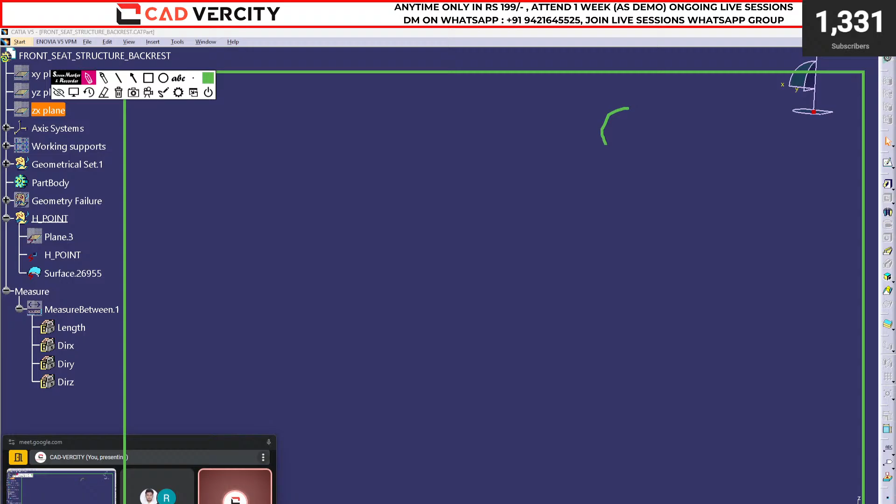Then you can take a top view, front view. Let's cancel this one. Undo. Here we will keep one assembly isometric view. Then here you can show the front view, top view. This is front view. This is top view. If you want, you can show the side view as well. Now you want to show the sections. On this, you can put some sections like this.

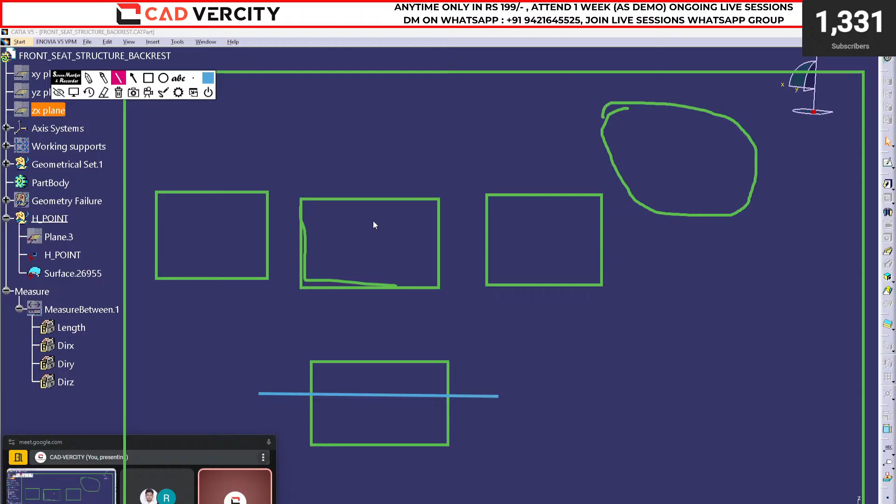So for this section, see, we have not completed this section. For this side section, the view will be on this side. Section cut like this. For this one, this view will be over here. You can put it over here, otherwise you can just move the view, no issue. It is not mandatory that your section cut should be in line with the views, okay? But your side view, top view, front view, try to keep them in one line.

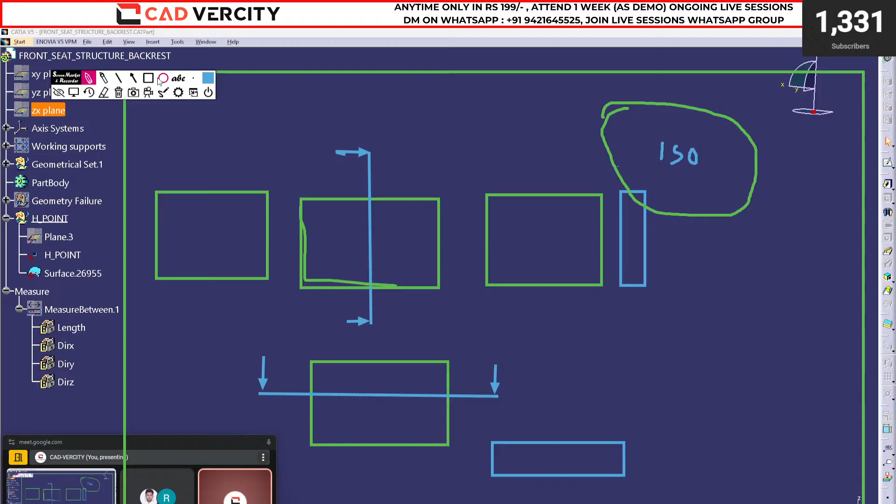So this will be your ISO view. ISO view means isometric view, okay? Now on the second sheet, you can add an exploded view. If you want to add it on the first sheet, no issue. Exploded view will be something like this. This will be your first part, second part, third part, fourth part, fifth part. You can show like this.

If you are assembling this part from the top side, you can move this upside. This is also going to assemble in this direction, no issue. You can just move the components which are going to assemble in y direction in the y direction. After this, you will have to create a BOM.

BOM means not exactly a BOM. You will have to add one table in which you will have a column for the serial number, and the second one for the name of the part. You will have to add balloons. 1, 2, 3, 4, 5, 6. There will be 6 balloons.

1, 2, 3, 4, 5, and 6. So what is the use of these balloons? This 6 number will be over here. 1, 2, 3, 4, 5, 6. And here will be the name of the parts. Got it? Yes or no? Sir, then what is the use of balloon? In balloon, you will mention only numbers 1, 2, 3, 4, 5, 6.

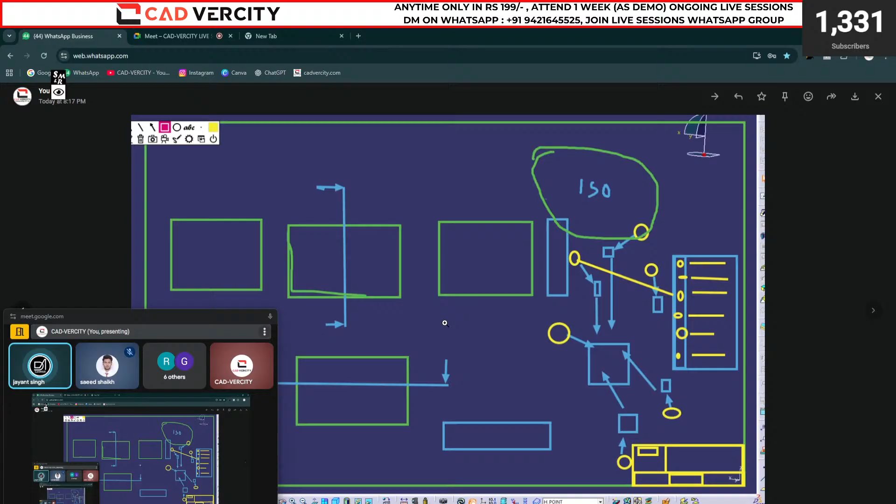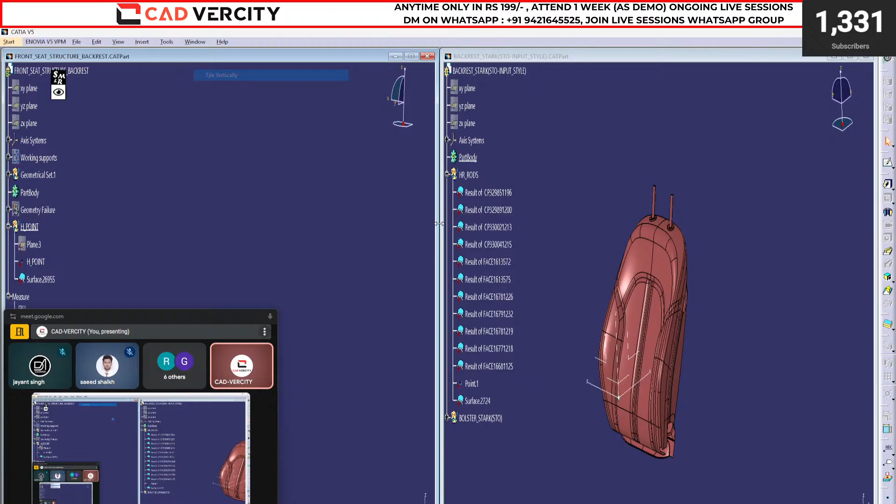Yes yes yes, no issue. Okay, so let's start. See, can you see my screen now? Yes, is it visible? Yes sir.

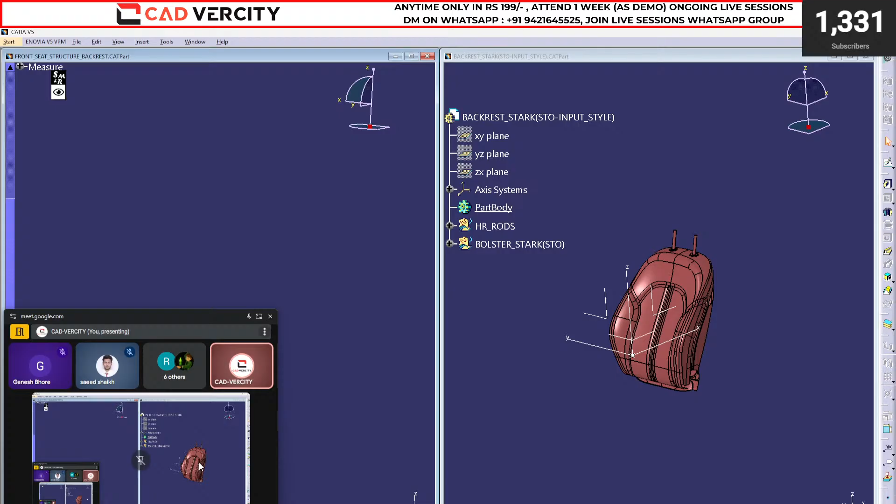Okay, now here you can see, Ganesh, as per your request, this is a backrest. Okay, so first requirement is here we have structure. On the left side window we have structure. Where is the fit all in? This one. Can you see the structure? Yes. Now what we will do, let's copy the structure and the style in one product. Windows vertical like this. File, new, take a product. Okay.

Again Windows vertical. Copy the structure. Right click copy. Right click paste. Right click copy the style. Right click paste the style. Okay, fit all in again. What is the issue? Why is it not working quickly? Fit all in is not working. No. We have taken the product. Sorry. Yes, fit all in. See, click on fit all in. It is not working. Why?

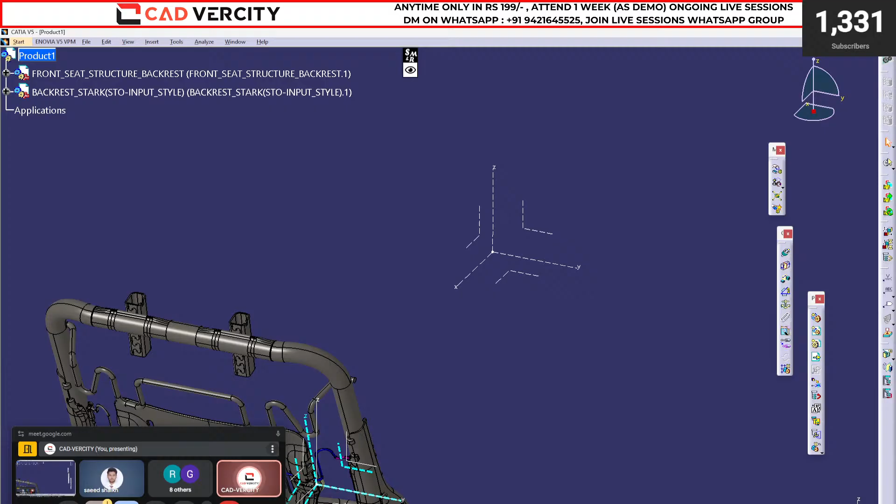It is a product. Inside that product we have two parts. No, fit all in means all 3D will be in, complete 3D will be fit in my screen. So why is it not visible? Because we will have to right click on the product, go to representation and say activate terminal node. Okay. See, now it will work. Fit all in. Okay. Again right click. If you want to put both parts in design mode, you can just right click component, representation, say design mode.

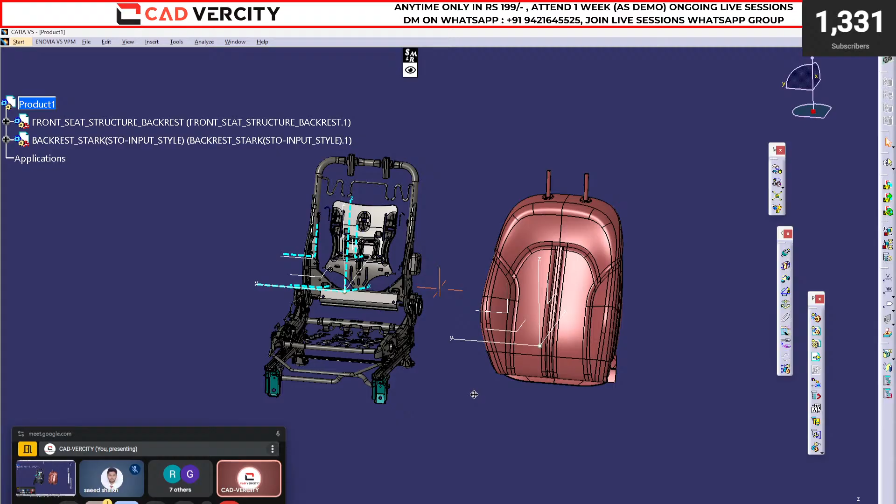Okay, now here you can see design mode. See, if you put your part in design mode, you can edit the sketch, you can edit any commands. If it is not in design mode, you can't edit it. Okay, you can't work on it. Okay, now tell me the structure and the style, the position is okay or not okay? Quickly. Not okay. So what we will have to do?

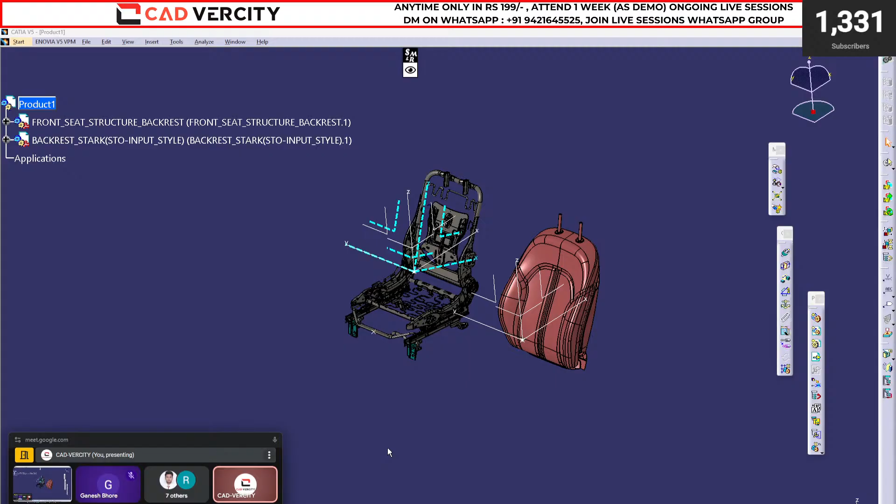Yes, Ganesh, others, how can we align? No manipulation. Quickly. Rajat, see, first of all, do you know what? Yes, Raja.

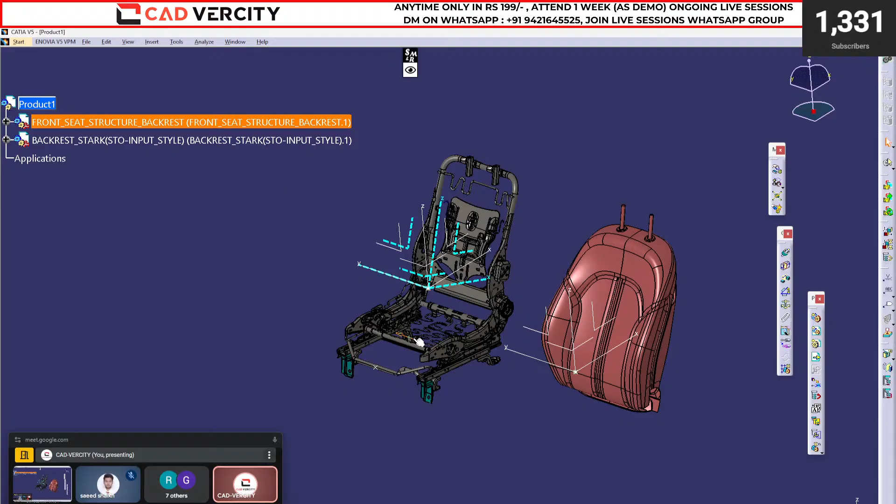Required? No. Otherwise, cost will increase. Height adjuster is mostly useful for the driver. Okay, so the basic structure will be the same for both passenger and driver, but some elements like the height adjuster and other lever mechanisms will be available only in the driver seat. Okay. So let me explain.

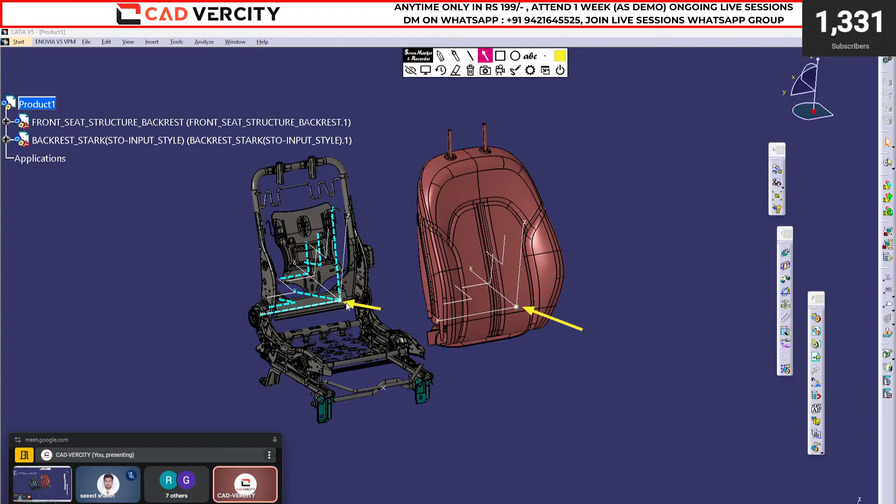So what is this? Let me explain to beginners. So what is this point and this axis system? Rajat, Said, please focus. Okay, top view. This is top view. And now where is the absolute axis system? Let's check where is the absolute axis system.

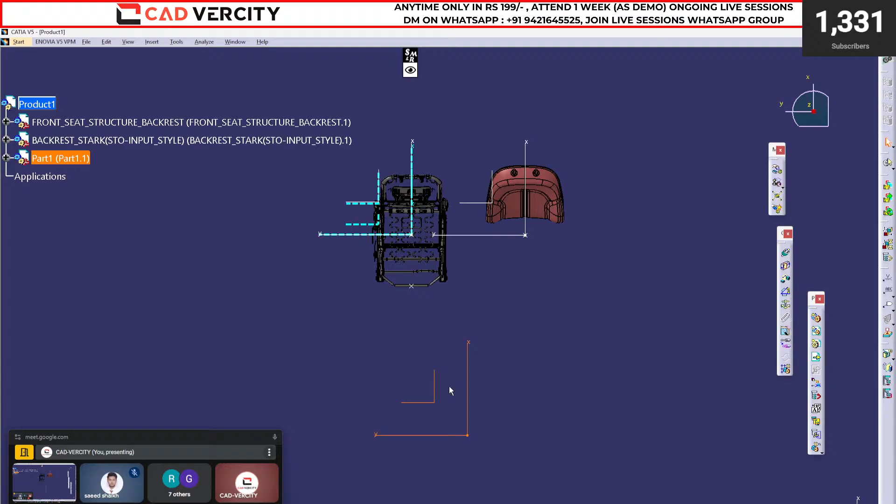Right click, component, add a new part. Click on yes. Can you see? Inside the new part we have the axis system, yes or no? This is our new part. Okay. So this is our absolute axis system. So suppose we are working in any file and in that file we don't have the absolute axis system, what will you do?

Ganesh, if you don't, yeah, see, delete. See, we don't have any axis system in this part. Okay, right click, open in new window. In hide and show, can you see? Do you have any axis system? Absolute axis system?

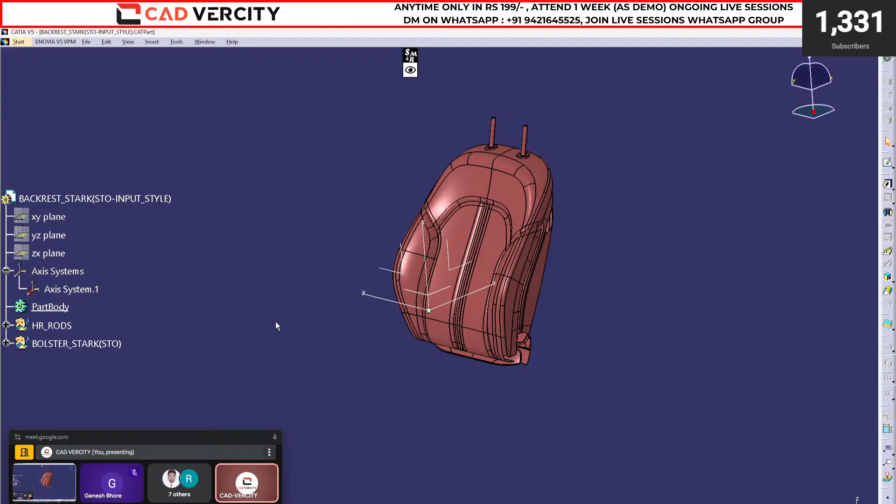Said, Rajat. Okay, sorry. Subhajit, this is here. Chinmay, Jain, Ganesh, Raja, Rajat, Said, Suyog. Okay.

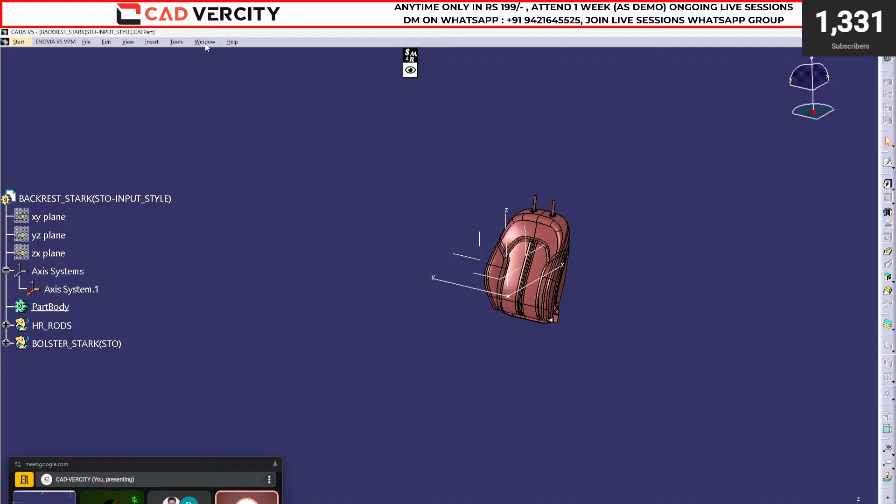Yes. Now tell me, is the absolute axis system available in this file or not? No. Okay. So how to create one absolute axis system? And what is the purpose of the absolute axis system? Let me explain. First, go to our product window. Double click, maximize the window. Click on Z. Here you can see, we have 2 points.

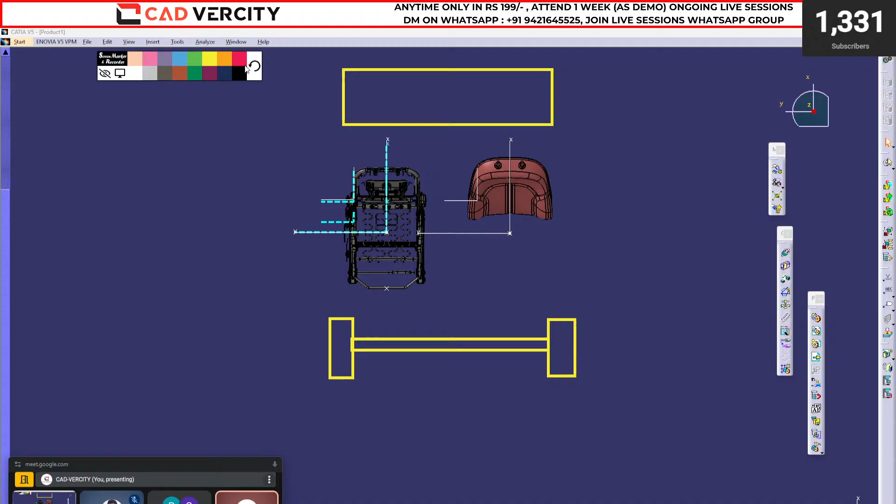Let's draw a rough sketch. See, this is the front axle of the car. This is your front wheel. Here will be the second row, and here will be the doors. Yes or no? Door will be here. Agree? Any doubt?

This is the front. The car view is on this side, and let's say here we have the steering. Now, what is the absolute axis system? The center of the front axle will be the absolute axis system, which is 0, 0, 0. Now, what are these 2 points? These 2 points are the H point. What is the H point? Quickly.

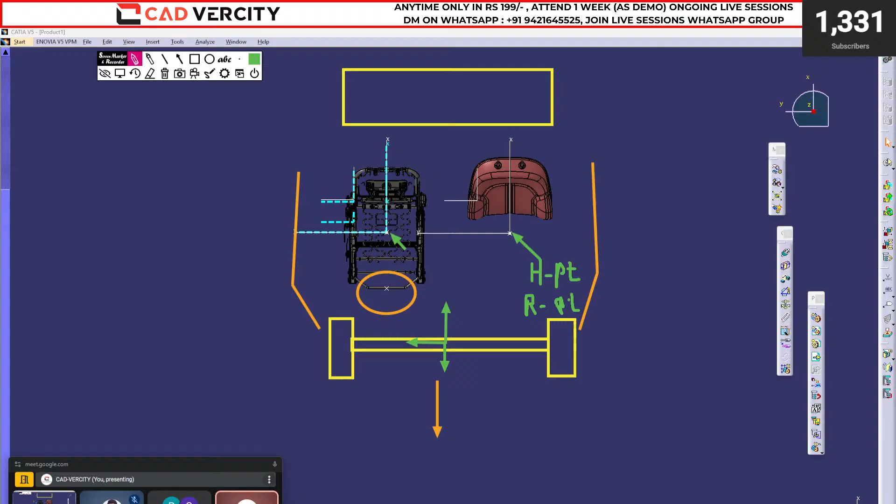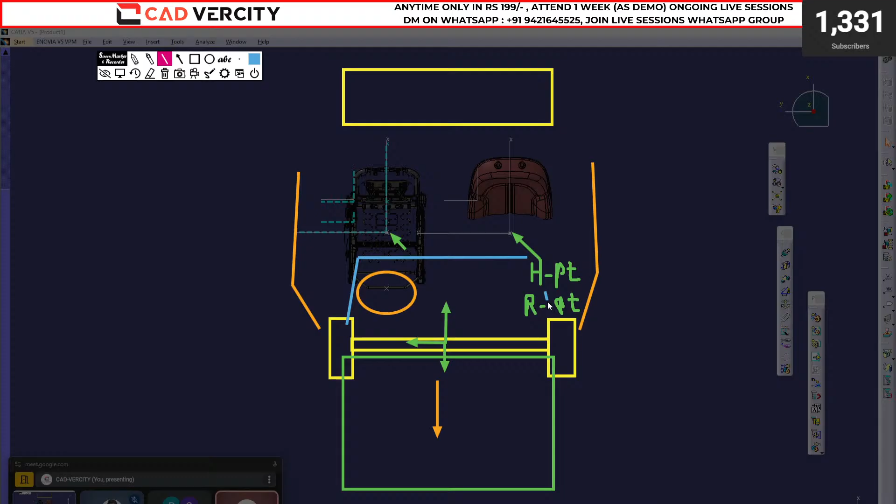What is the full form of H point? H point. R point. Quickly. Any doubt? Others? Here will be the front portion of the car. The front shield will be something like this. Yes or no? Here will be the headlamps, if we check from the top view.

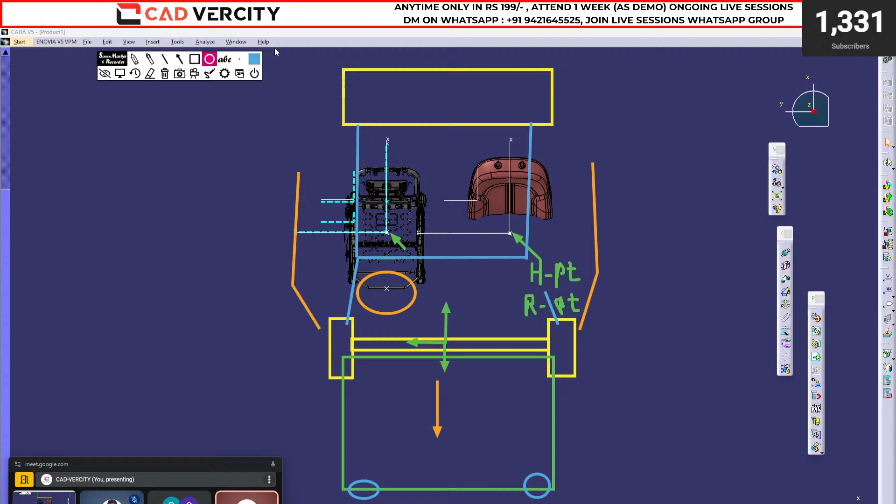What happened? Just a minute. So here, what is this H point and R point? Quickly. The H point is the hip point. Said, Rajat, what is the H point? Hip point. And the R point is the reference point. So are the H point and R point common? No. Both are not common. So what is the R point?

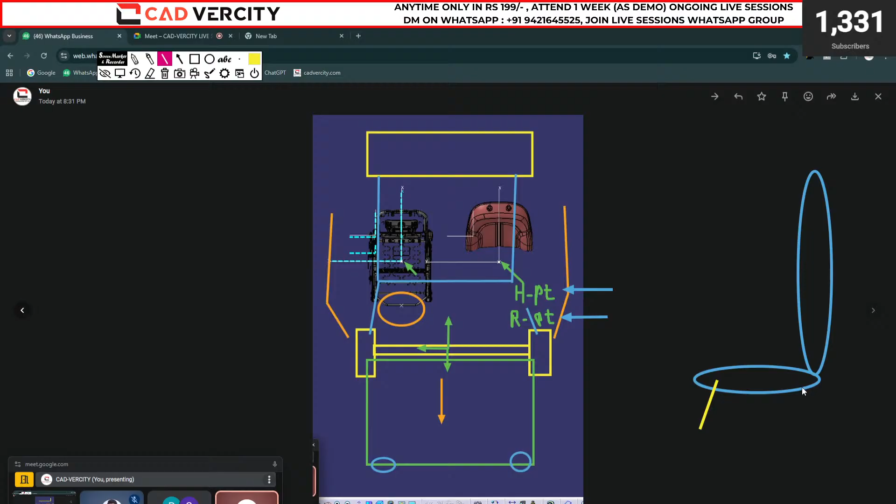R point, please focus. See, this is your backrest. This is your cushion. And we have some motions in our seat. Tell me, what is this point? Red point. The red point is your R point and H point.

Now tell me the direction. This will be which axis? Quickly. No, Z. This will be which axis? If we check from the top side, the first one is perfect. Second is perfect. And where will the Z axis be? Normal to my screen. Yes or no? Normal to my screen means this upside is our Z. Agree?

This will be Z. And this direction will be, quickly? You just told me, perhaps. Perfect. Which one? What do you think?

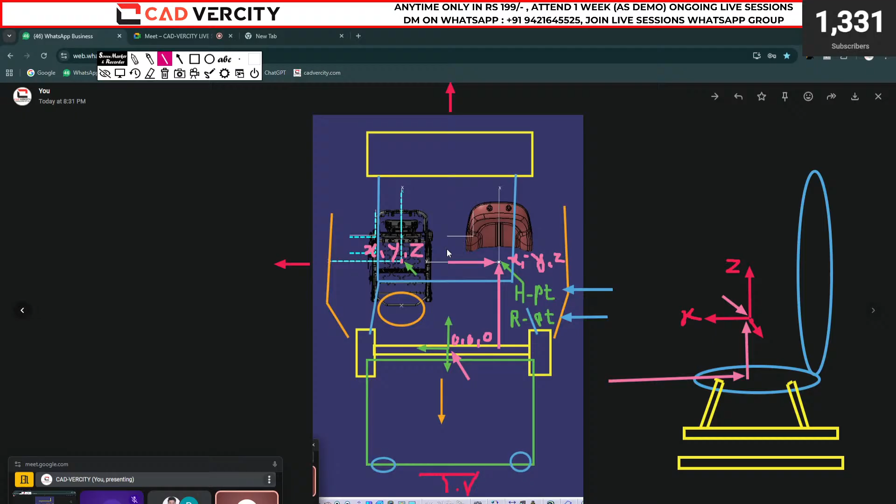Okay. What is outboard and inboard? Quickly. Rajat, Ganesh. Inboard means towards the center line, perfect, and outboard means away from the center line. Simple. Yes. Inboard means toward the center plane of the absolute axis system. Okay. Ganesh.

Yes, sir. See. Everyone, please focus. This is the center plane of your absolute axis system. Agree? Yes or no? Quickly. Okay. See, this is a plane passing through the absolute axis system. Now, tell me, is this the driver or passenger side? Driver side. So, tell me, will this side be inboard or outboard?

The first one will be inboard. Quickly, please focus, everyone. The first one will be the inboard. The second one will be the outboard. Any doubt? This is your absolute axis system. Its center plane will be the center line of your car.

Okay, center plane. So let's say Said, you are the driver. You're seated on this seat. So the center plane means the xz plane of the absolute axis system. Yes, because this is your y. Can you imagine?

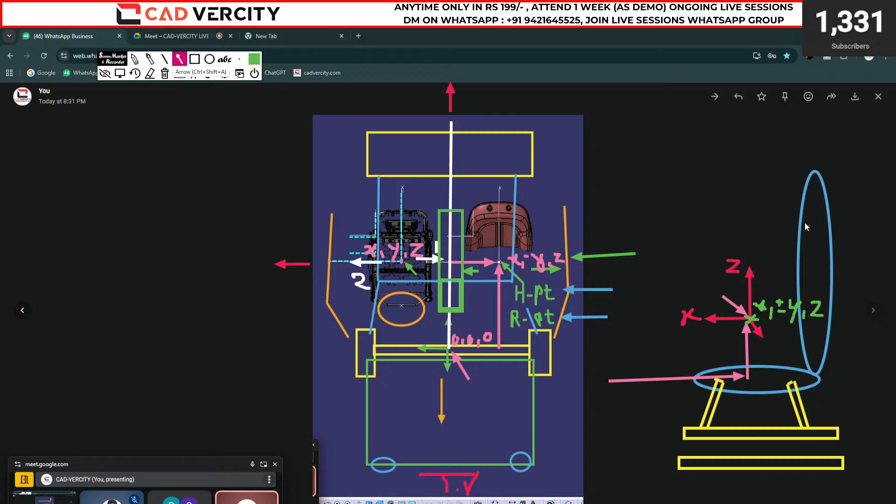Ganesh? What, when will you use the R point? What is the purpose of R point? Perfect. Good. It defines the position of seat with respect to BIW. Okay. It is, what is R point? It is a point which will define the position of seat inside the car. Okay, Said, Rajat, Ganesh, others, clear?

Okay. And what is the H point? Let's discuss first R point. See, let me take this screenshot first. Let me show you one video.

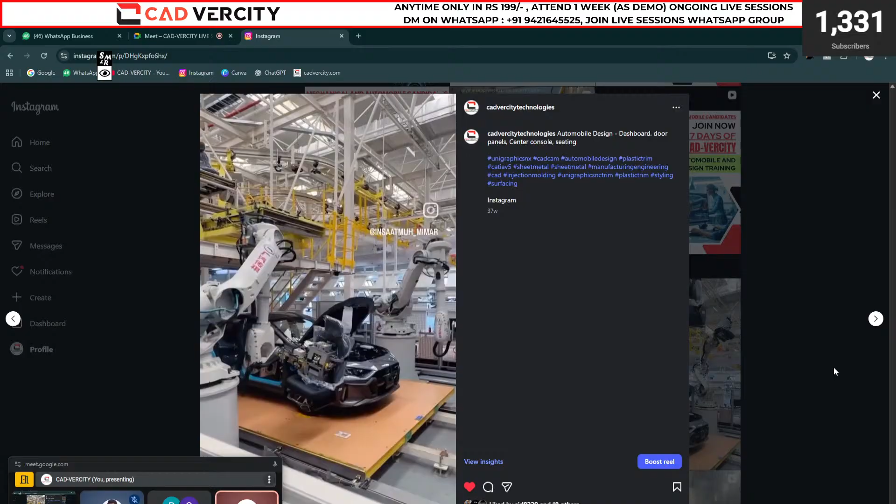Okay, let me show you one video. Is it visible? Can you see? Inside car, the robot is assembling the complete seat on BIW. See? Can you see this towel bar?

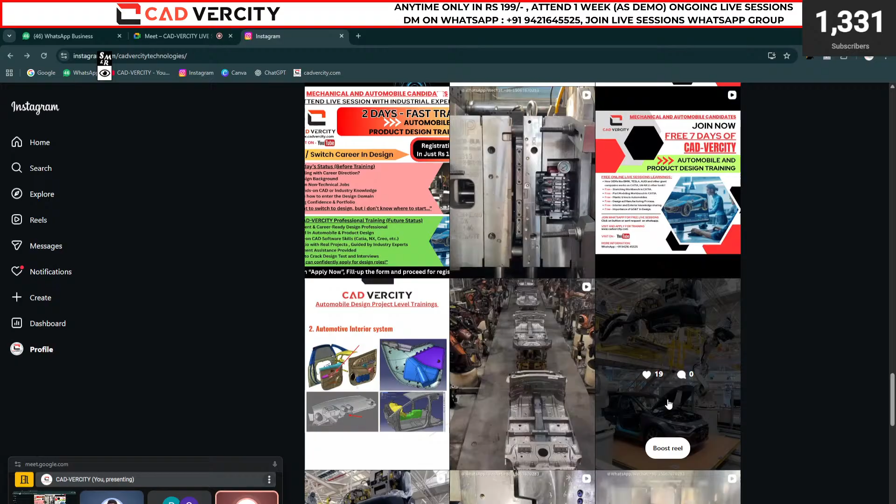Okay. So how? So what is the reference position? How is this robot assembling the complete seat inside a car? What is the position? The position of seat inside the car means R point. Got it? The position of seat inside a car is R point, means reference point. Then, sir, what is H point?

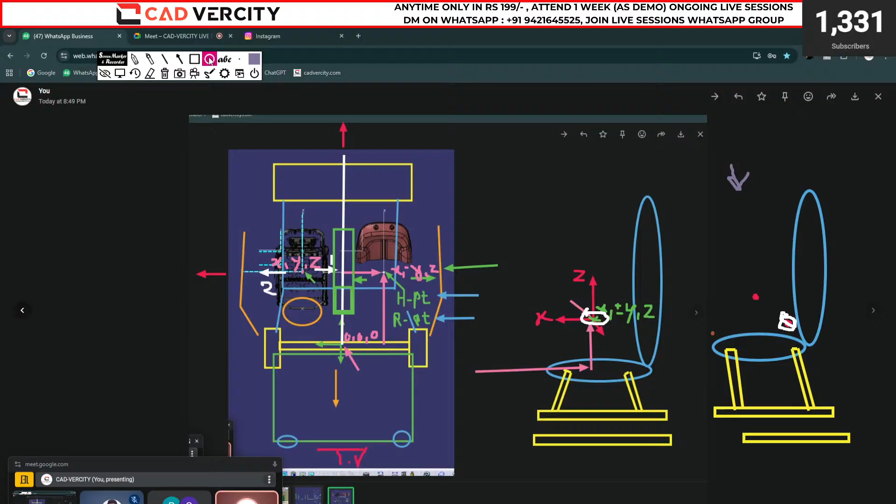So sir, what is, so that person we will call it as mannequin. What is this?

What is this? This is a mannequin. Okay, and this point will be the H point. Got it?

Rajat, others, tell me, did you move the seat? Did you move the seat? Seat is fixed. Seat is fixed on BIW, on the structure. What you have done? You have operated the mechanism. You have applied some motion of seat. That's why your position is changed now.

Okay, this is for a 4.5 height person. Now tell me, if the height is, let's say, 6.5, what will you do? This is 4.5. If height is 6.5, what will you do?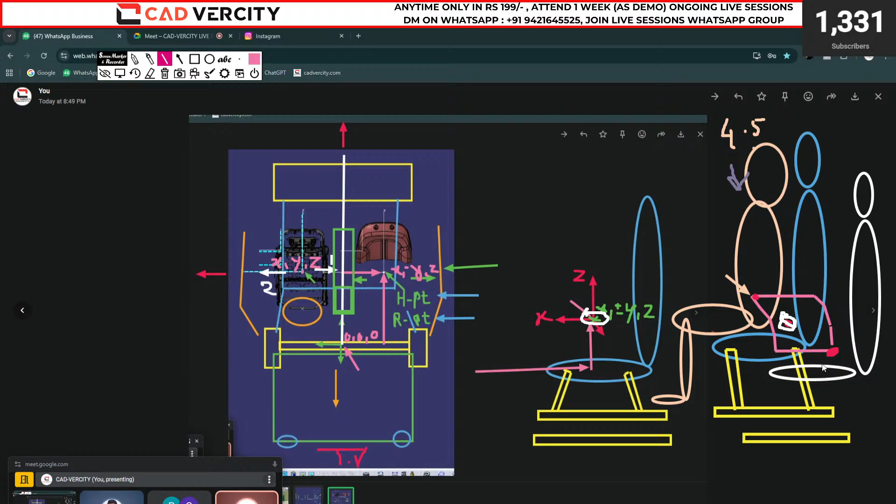See, it is not the highest and the lowest point, okay? The person, the driver, comfortable, yes, according to the occupant - not according to occupant. According to the kinematics of seat, the mechanism of seat, the possibilities of the H point in which it can move - that box, that zone, we will call it as travel box.

No, it is not fixed size. It depends, no, it depends on the mechanism. Depending on the mechanism of the seat. Every seat will have something different. Sorry, no no no, it depends on the mechanism. Clear everyone? Any doubt? Quickly.

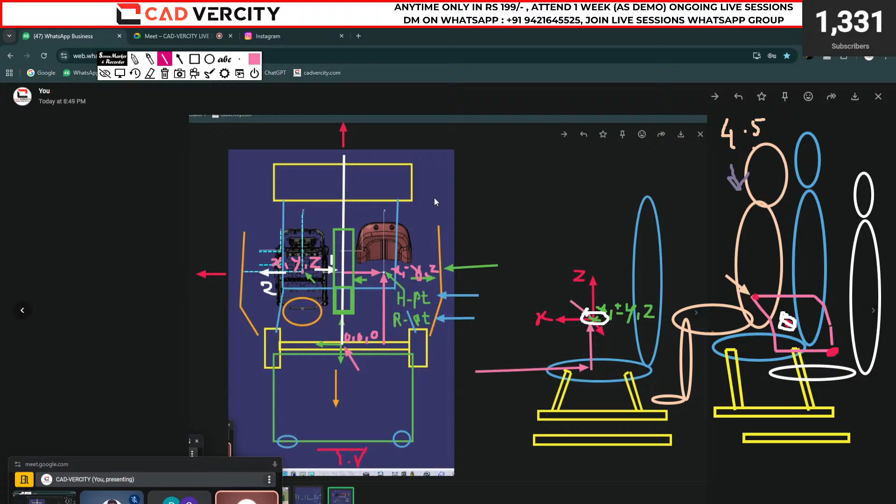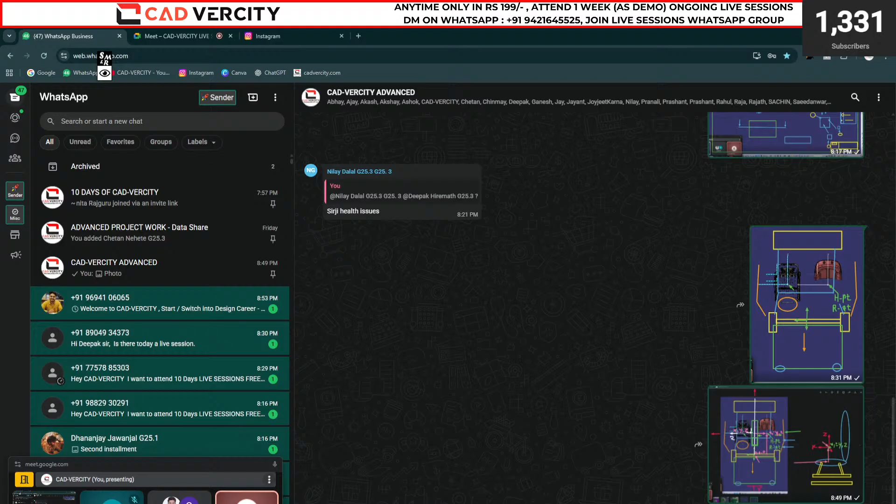Perfect. Okay, we have one request on YouTube chat.

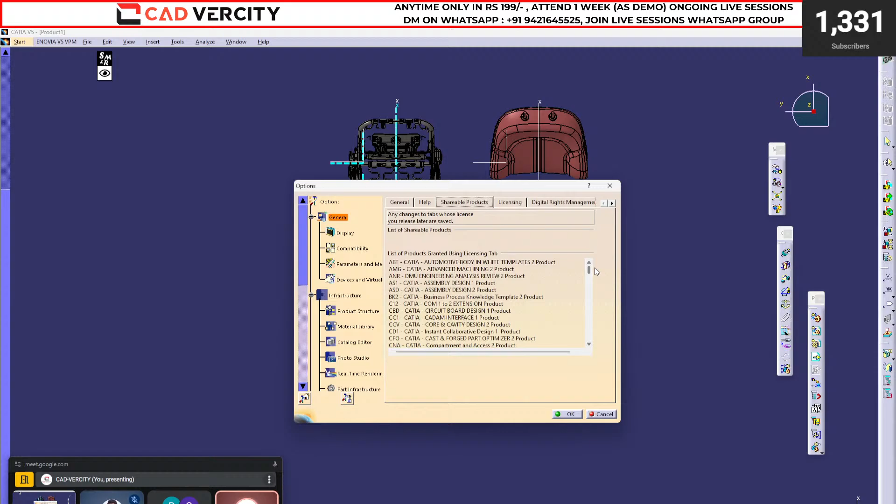So sir, do we have to learn all these licenses? No, only for now we will use GSD and we will use kin. Okay, for kinematics, if you want to build some kinematics, we will use kin. If you want to work on GSD, meaning generative shape design surfacing, you will use GSD.

Okay, coming back to our discussion, this one. Okay, so what is this box? Quickly, what is this box? Let's revise, quickly - travel box. What is the purpose of travel box? How will you define the travel box? What is the definition of travel box? Quickly, the reply should come in one second.

Sorry, please repeat, Ganesh. At what extent? Okay, so on which it will depend? Perfect. And which point will be fixed? What is the purpose of R point? To locate the seat inside BIW, okay, inside a car. And what is the purpose of H point? Tell me, between which components R point will show the relation?

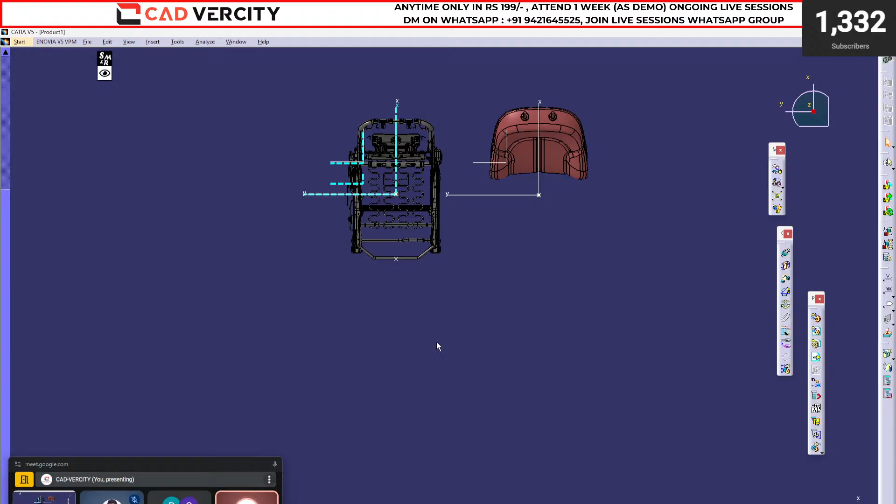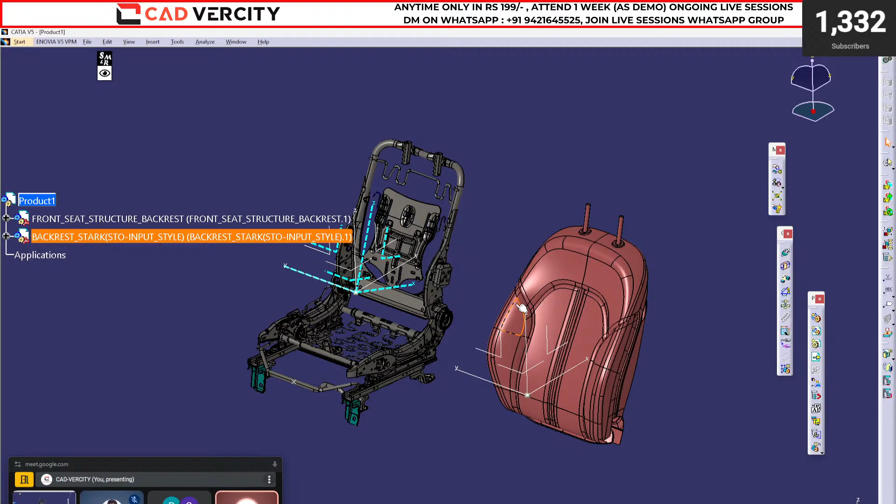Now here you can see this is style and this is structure. And what is our task? Now the task is you have to consider this style and create a form with respect to this structure. Now the blocking point, first is that the position of style and the position of structure are not matching. Both are not okay. So what is our first task?

You will have to locate this style on the structure, or you will have to locate the structure on the style. So logically which will be the good one? Logically, what makes sense? Will you take the style there to the structure, or bring the structure to the style's location?

Logically, when the style is created, the styling team, whenever they create this style, they will create it on the H point. They will consider the H point and generate this surface. So whatever style you have, you will not move the style. So while working on a project, if you have the structure, you should have two different structures for the passenger as well as the driver. Clear, yes or no?

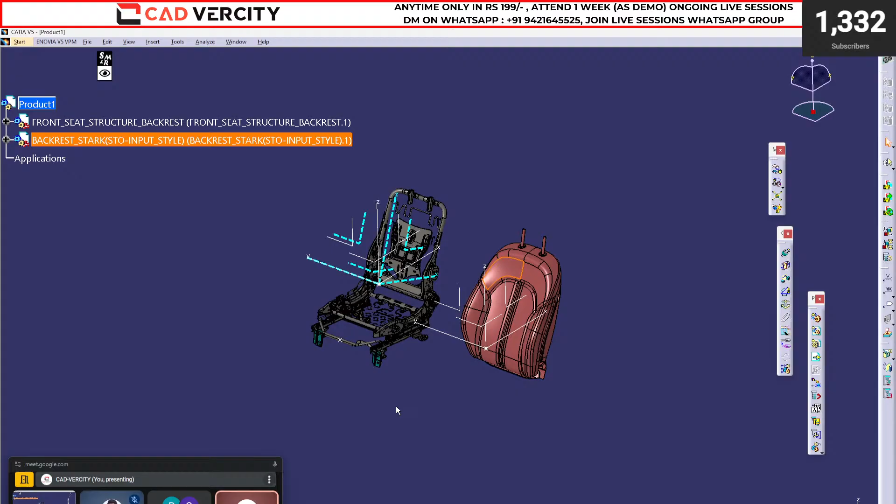Now let's say the style is same. As per input, if I have received that I have to use the same style for driver as well as passenger, then you can just move this style over there. Otherwise, if in the input they have not mentioned that you have to use a common style for both driver and passenger seat, you will have to ask for a new style for the driver, and this will be for passenger, and again you will require the passenger side seat structure. Clear?

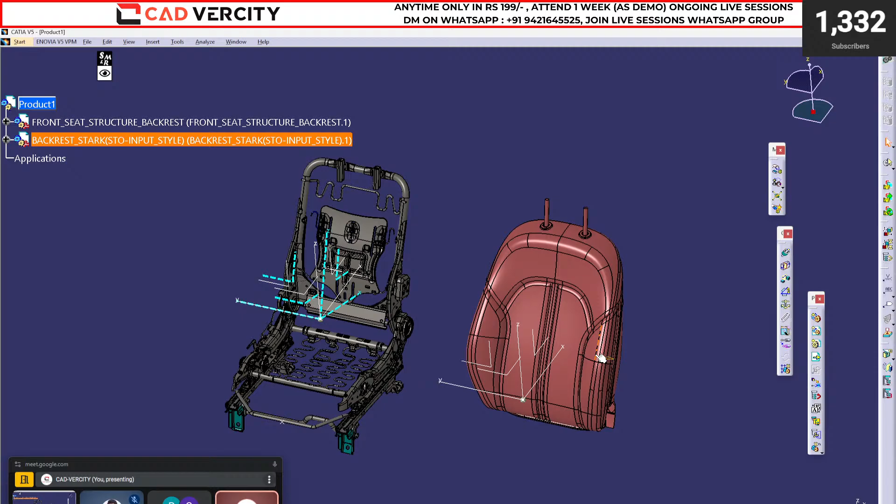Yes, because in driver seat we have so many comfort and other things, the kinematics, massager and all, heating mat and all. Yes, even though on the backrest mostly here an airbag is also present.

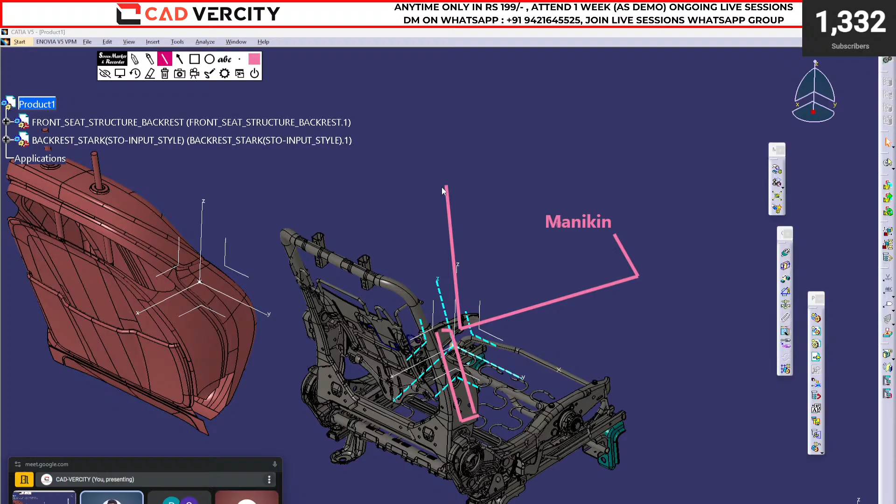This is, sorry, there's a lot of tool issue. On this side mostly we have the airbag model, on the outboard side. Why? Because here the mirror window is present. Yes or no? This is door. Okay, so on this side we will have one airbag.

Okay, now tell me, airbag will be deployed like this, yes or no? So let's assume that we have one manikin over here. Here there's a style. We have style over here. So airbag is deploying, and the airbag's model is on the structure.

So tell me, we will need one cutout in our foam, backrest foam here, a cutout will be placed from where the bag, the airbag, will come out. Yes or no? So tell me, can you use the same foam on this side? Yes or no? Why not?

Airbag extra नहीं. We will need airbag from this side, yes or no? Outboard side for the passenger. This is driver, so this is outboard side. So we can't use same foam on both sides.

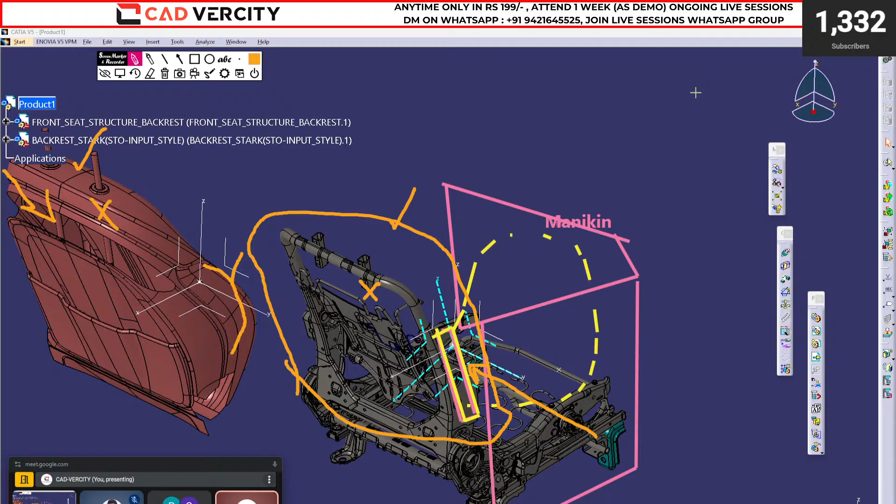Okay, but yes, see ये जो है कटआउट डालना वगैरह ये जो बैक साइड से जो कुछ रहेगा, this is our part, engineering part. But for style we can use it, yes or no? In style they will not add any cutout. Why? Because it is a technical portion, we will have to add cutout. The styling team will not add any cutout. Clear? It is a technical portion, so we will have to modify. डिस्कस करेंगे कि कैसे मॉडिफाई करते हो. ओके.

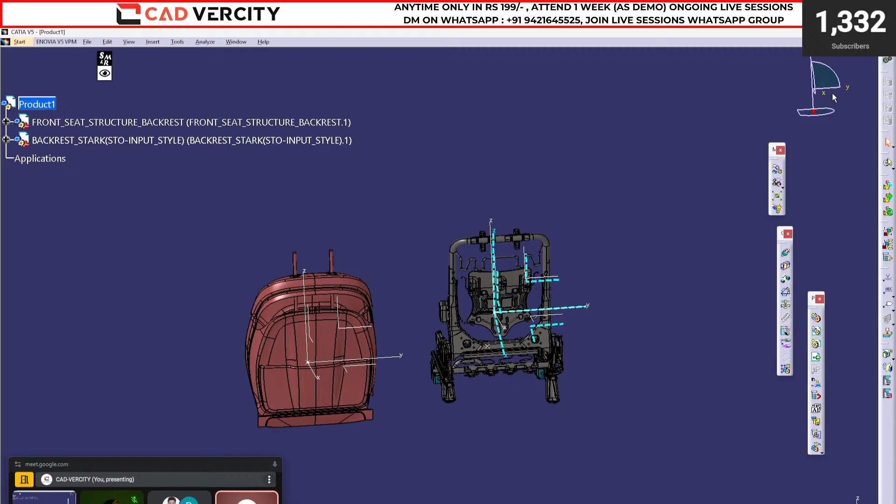See, we have the style. Let's say, click on Y, X. Let's say we have this style. What I will do, let's copy this style. Right click on the product, paste it. I have 2 copies now. What happened? Right click, copy. Right click, paste. Yeah, I have 2 styles. This is the first one, this is the second one. Let's hide the first one. Let's move this style over here. So how to move? Simple.

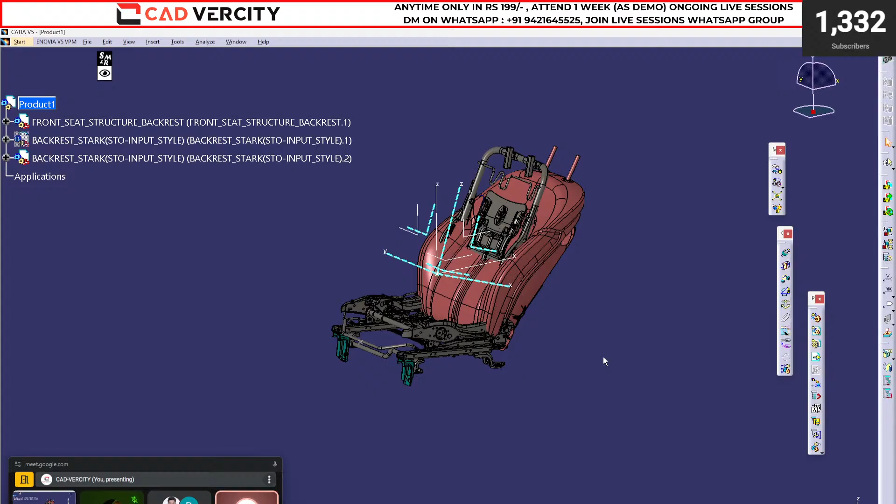Snap this axis system on. See, आपको axis system select करते वक्त same axis system select करना है. You can't select this axis system with this blue one. See, समझ में आ रहा है क्या हो गया? Yes or no? Depending on the orientation of your target axis system, the orientation will change. So undo. First you will have to check, यहाँ पे axis system ऐसा है.

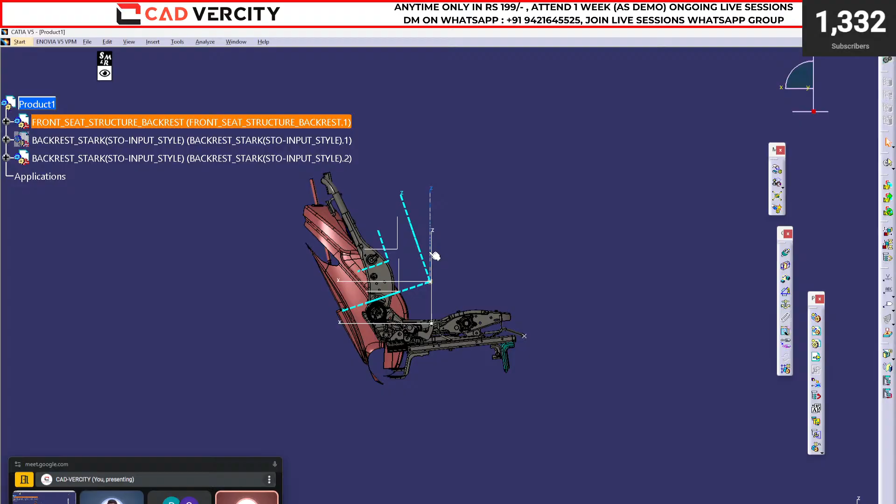If I click on Y, see, in this file I have axis system like this: Z, X and normal to screen Y. On this structure, if I click on the structure, I have 2 axis systems. One is this one and second one is this one. So कौन सी axis system use करना पड़ेगा? Which axis system will I have to use? This white and this white for the location. So while working on snap, click on the snap. पहले सोचना है, you will have to think what you have to do now.

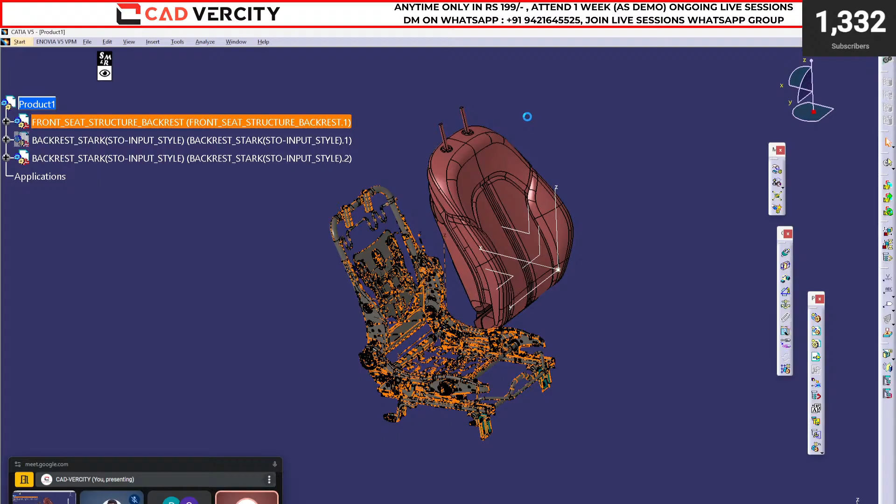Should I move this style on the structure or should I move structure on the style? For this project, let's consider we will use the same style for this side seat. So what we'll do? Yes, perfect, side. If we have different style, then we will use the different one, no issue. Okay, so this time let's fix the structure. Select the structure, click on fix. Done. See, in constraints you will find one fix. Can you see front seat structure backrest? Right click, hide it. Done. Any doubt? Yes, no?

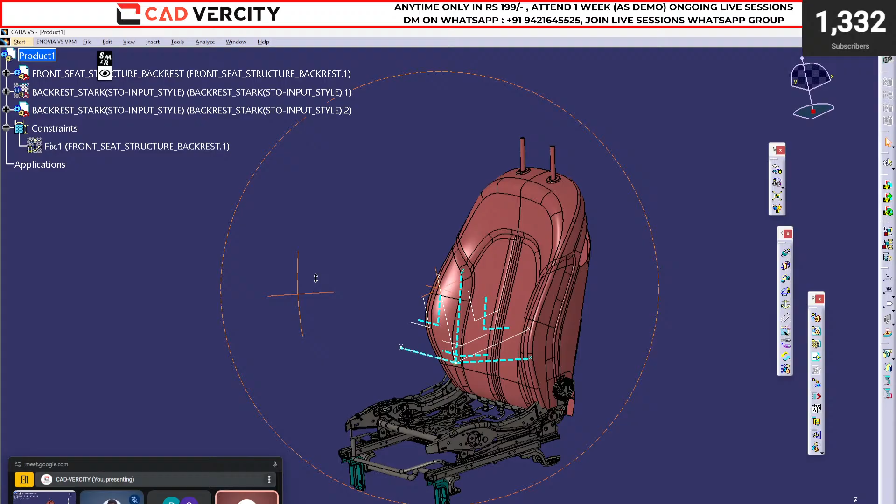No. Perfect. Now, what we discussed, seat को fix रहने देते. We will move the style on the structure. So, tell me, in snap command, selection कैसा रहेगा? What will be the sequence of selection? Rajat, Chinmay. Perfect. Activate the snap, select the axis of the style and कौन सा axis select करना पड़ेगा? Blue or white? White. Click on it. Now tell me, is it perfectly fixed? Yes or no? Any doubt, any issue? Done?

Now let's fix both. Select this style, make it fix. Hide this one.

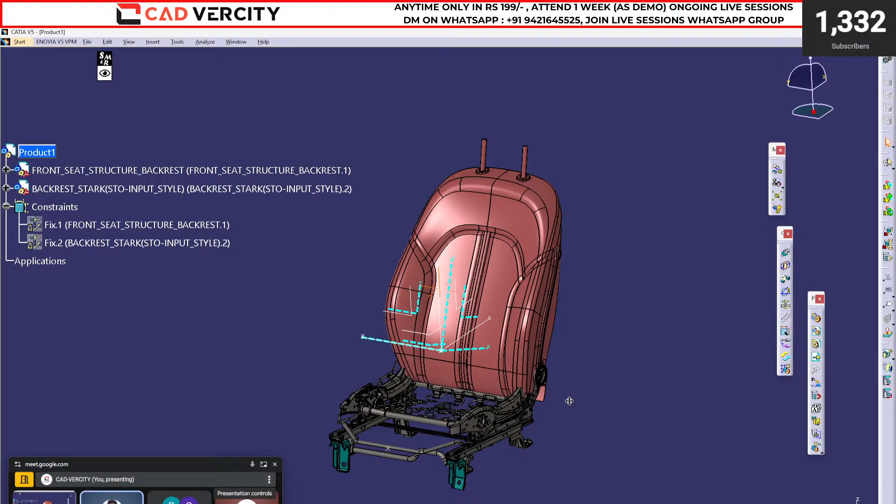Now sir, I want absolute axis system. I want to check what is the coordinate of my seat. Sir, how to check? बताइए. What is the process? Quickly. I want one absolute axis system. Quickly. Sorry?

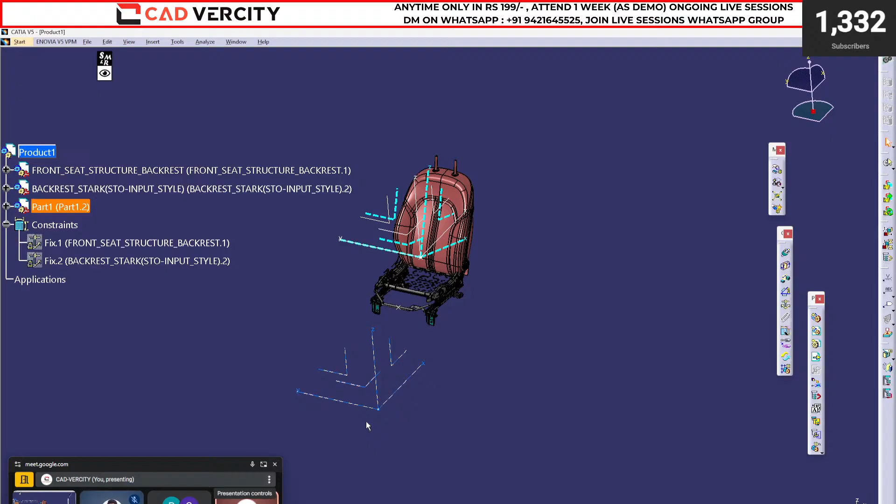Okay, it is an empty part, but we will have an absolute axis system. यहाँ पे दिख रहा है. Okay, now sir, I want this axis system inside my styling part. This is my styling part. Yes or no? STO style input. Okay, sir.

इसको क्या क्या कहते हैं? What is the naming convention for this one? Some companies, some OEM, some MNCs will call it as Stark, STARK. Someone will call it as style. Someone will call it as STO. Clear? Depending on country to country.

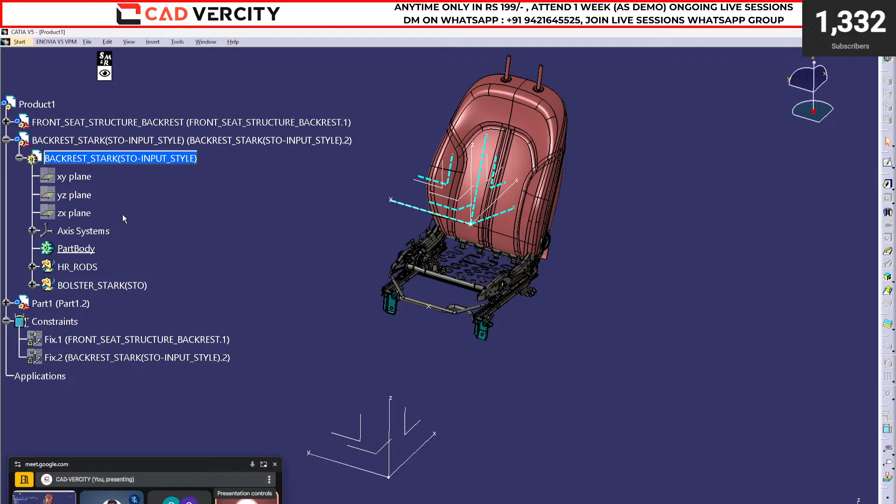Okay, style means STO. Now we have inserted a new part. We got one axis system. Now sir, I want this axis system inside my file, this file. So double click, activate your part, this one, double click on it. Where is this axis system? Right click, center graph. Here is my axis system. Can you see absolute axis system? Right click, copy.

Double click on this one. Where is the style? This one. Backrest style. Double click on it. So it is in blue color, means it is activated. You will have to double click. Right click, paste special. As a result, click OK. Any doubt? See, expand this one. We got a new axis system 2, which is our absolute axis system. Yes or no? Clear? Yes, sir.

Now let's hide this part 1. See, click on your Stark style.

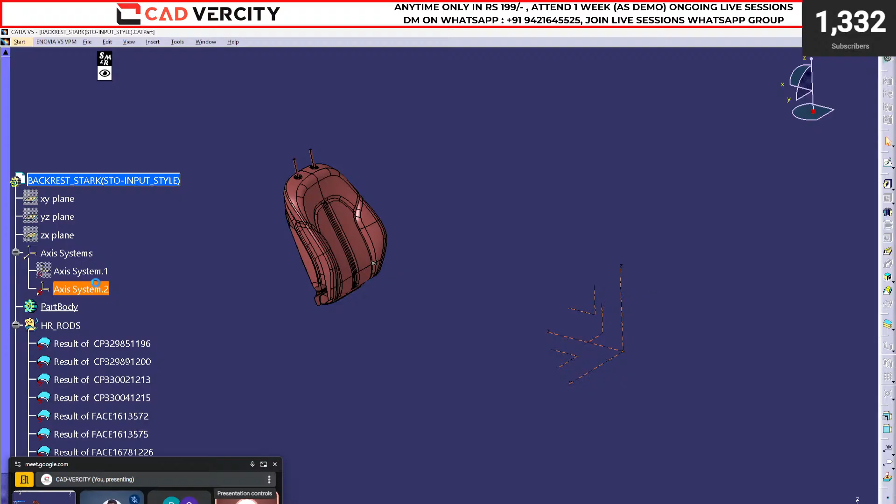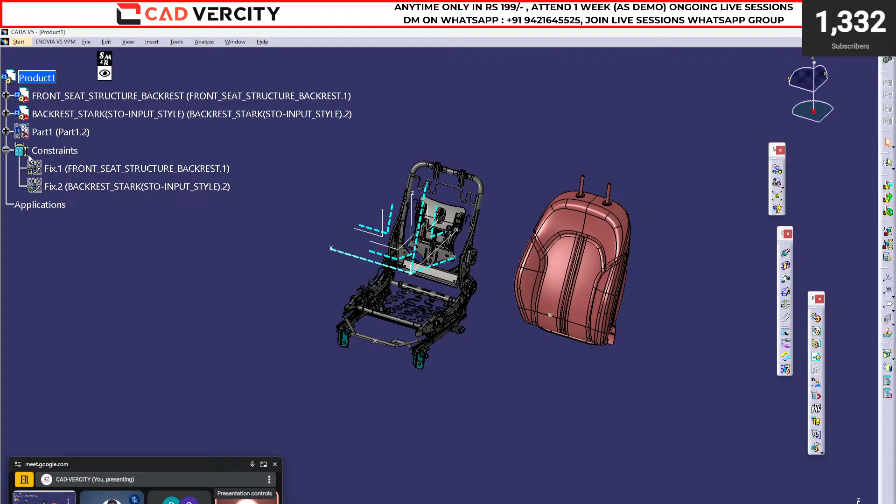Delete this fix. Now in this case, what you can do quickly, we don't have any axis system, but we have H point, we don't have absolute axis system. Any logic? I want to position this style on this structure. What you will do? Quickly. I will create one axis system. Where? Let's delete this one. Tell me from first step. Quickly. Last point, then we will close the session. We'll connect tomorrow. Tell me, how will you create the axis system?

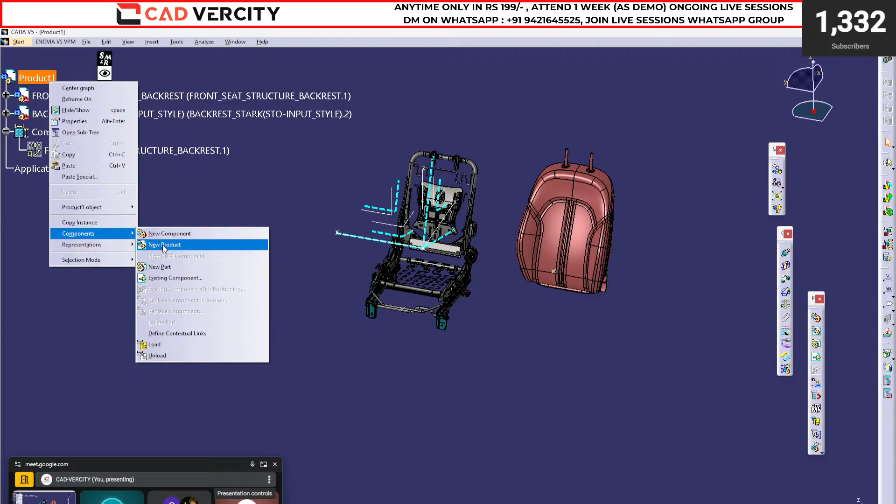अभी हमने किया, just now we did. Right click components. Perfect. Product or part? New part. Then go to part 2. Double click, right click, center graph, right click, copy. Then go to product. Paste special. Product, paste special what?

Where? In style. Okay, in BACKREST style. Double click on it, right click, paste special as a result. Okay, then we got one axis system, which is absolute axis system. Then

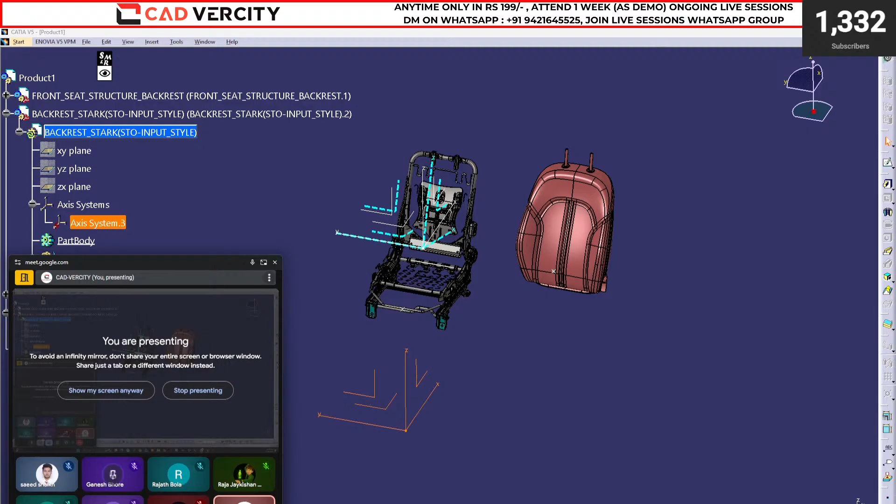No background noise. Then others, क्या कर रहे बाकी? सुभजीत, सचिन, चिन्मय, what are you doing? सचिन, चिन्मय, सुभजीत. I think Subhajit is in office. Chinmay, Sachin. Quickly, next step, quickly.

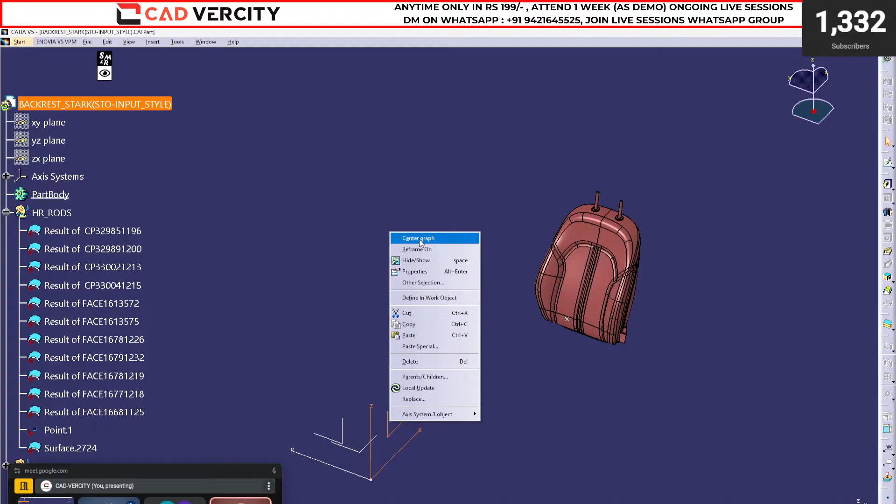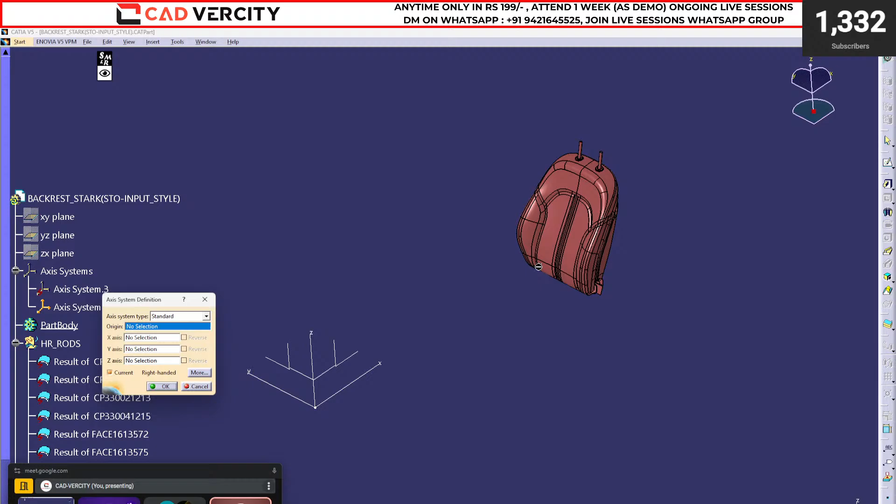See, open this style in new window. Okay. See, we have absolute axis system, yes or no? यही लाया था हमने axis system 3 जो copy paste special as result किया था. Yes, we have H point. Can we create one axis system? Before creating axis system, make this axis system as current, because this is our absolute axis system. Then insert one axis system on this point. Click OK. Any doubt?

Yes or no? No. Control S, save the file. Now Control Tab to switch the window from part to assembly. Control Tab. I'm in product now. Assembly. Okay. Double click on the product. Now, can I repeat the same command?

Snap this axis on this one. Tell me, can I hide this axis? Yes or no?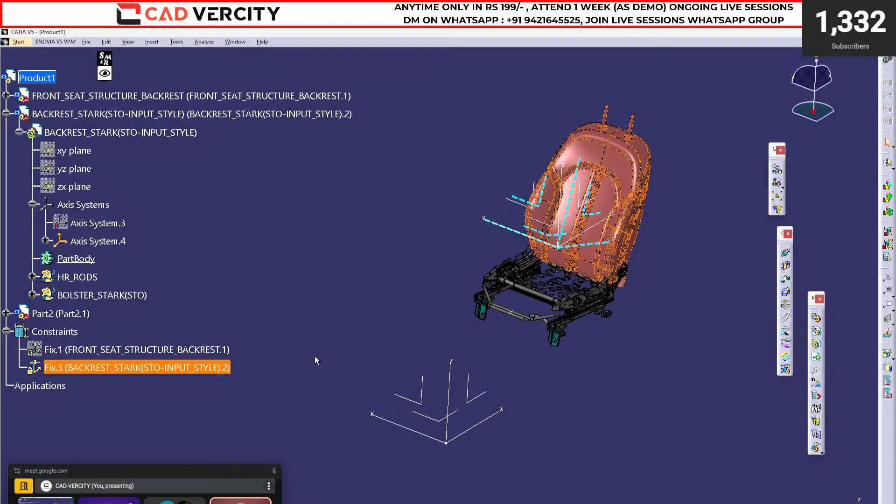Yes or no? Quickly. Select the style, activate the product, double click on it, select the style, fix it. Clear? If you don't have any axis system and only if you have the H point, can you create one axis system with respect to absolute axis system? Yes or no?

And what if you don't have the axis system in structure as well? Structure में भी axis system नहीं है. What you will do? You have the structure, you have the style, but you don't have the axis system. What you will do? Quickly. Okay then. कैसे create करोगे Ganesh? How will you create? With same process?

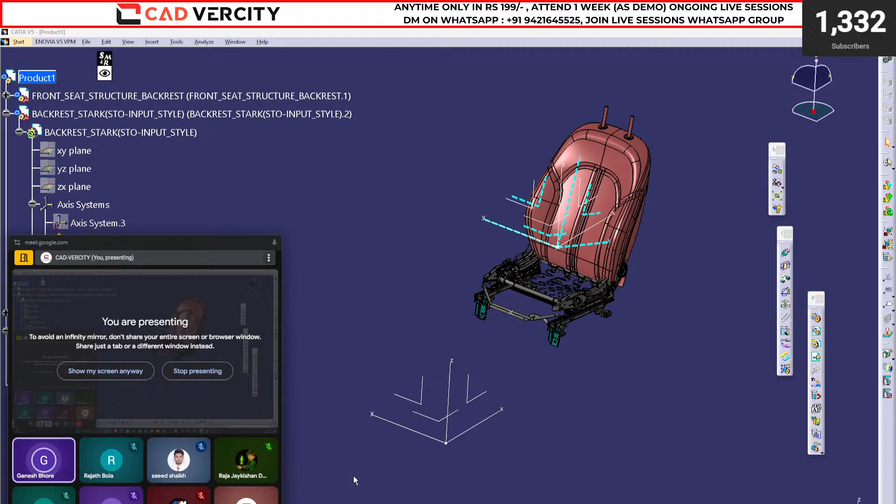हाँ, simple. Then you will repeat the process, same process for structure as well as the style. You will insert a new axis system on H point of both the structure as well as style. Then you will just snap from style to structure. Okay? Clear everyone? इतना दिमाग लगाना है. Clear, yes or no? Okay. Good question, Ganesh.

Sir, what if we don't have any H point? So in that case, your client will share the coordinate 300, minus 450, 268 like this. Clear? Now tell me, you have the H point? This will be in your presentation. Ganesh, clear? Everyone? Yes. Now, if you receive the coordinate, what you will do first? Simple, we will create the H point with respect to absolute axis system. मतलब 0 0 0 से you will create a point at 300, minus 450, 268.

On that point, what you will do? You will create the axis system. You will insert the axis system. Same you will do for the style. Because for the structure and for the style, the R point, H point will be same initially. Okay? Ganesh, clear? Yes, sir. Perfect. So for today, let's stop. Good.

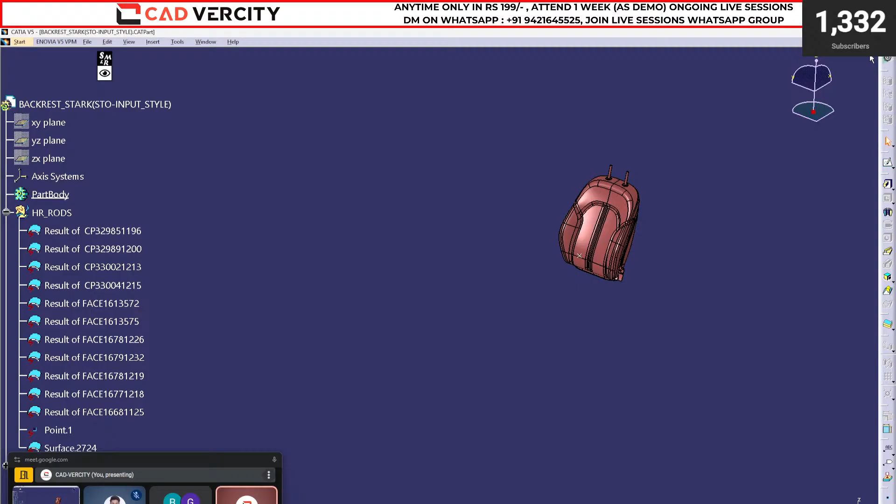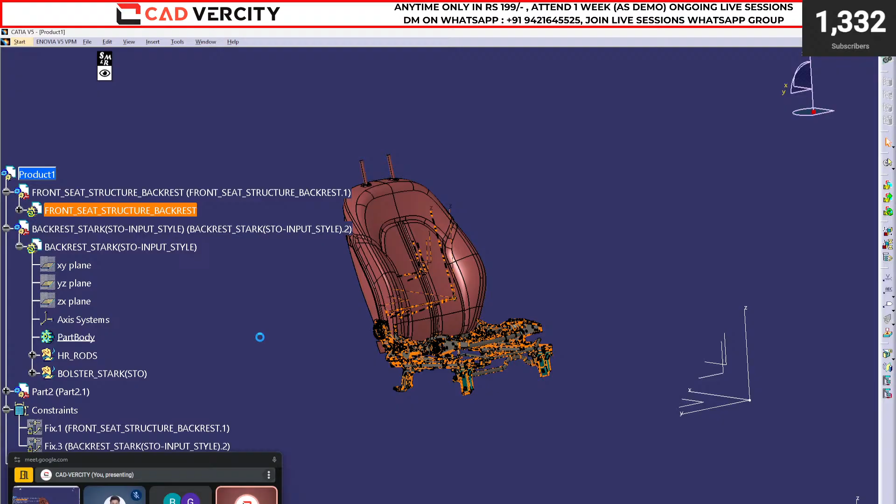Let me open this one. Let me delete this axis system and you create the axis system by your own. Delete. Enter. You have the H point. Save. Structure. Let's delete this as well. Double click, then delete. Select this one. Let's delete this one. And let's hide this one. Control S, save the file. Now you have two files in which there is no axis system.

I will share this file with you. Just a minute. Refresh. I will share this file with you. Please check. Did you receive the file? First one. Let me delete this one. ये delete कैसे होगा? Delete. Delete for me. Delete for everyone.